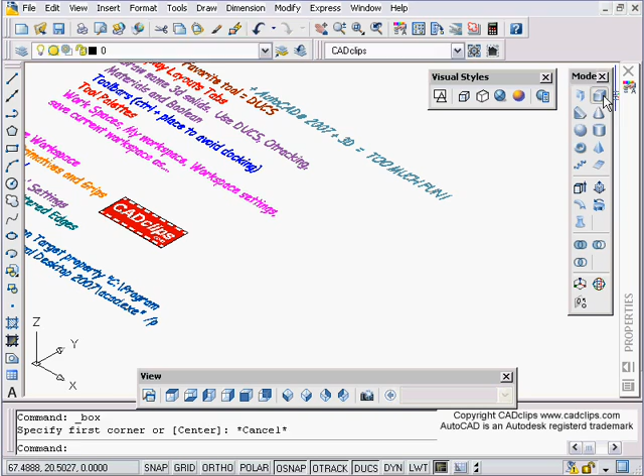And then I go in, start here, click - again doing a rectangle, I can use snaps and OTRACK, etc., and use my different options depending on if I have dynamic input turned on. But the main thing is I can draw that and then drag it up.

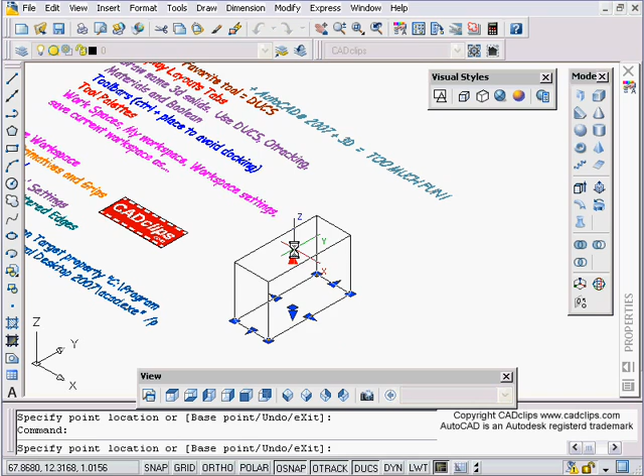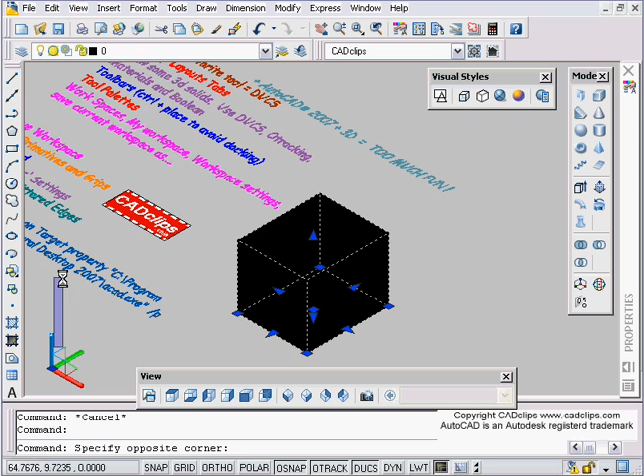Once I have that, I can grip on that solid object now and stretch it out. If you grab the square grip in the middle, we can move it, depending on how you want to do that. And then, depending on your visual style, you might be able to move some objects around - remember this guy over here, by hovering on there, we can do that, etc.

So now we can go and draw some more shapes as we saw before, and they all have their own characteristics - cone, draw them up, sphere, okay, a torus. Read the command line: specify center point here, specify radius or diameter here, and then the thickness of the wall there. M for move it over.

Pyramid, kind of like a square. Again, you can use your ortho if you want. You can also read your command and type in numbers, etc. along here.

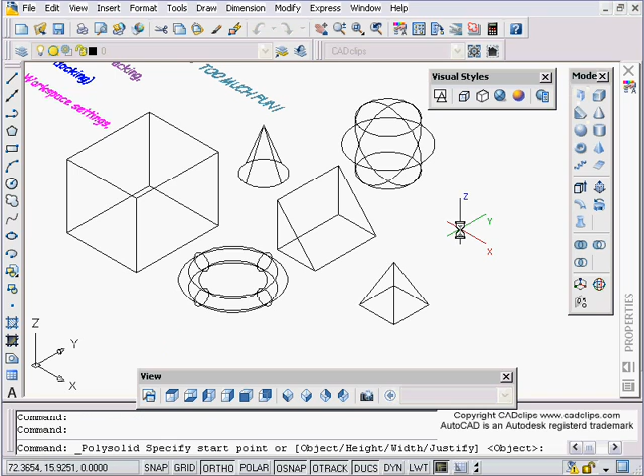Got a new one over here, polysolid, which is kind of like drawing a wall. First thing we want to probably do is specify a height - H for height - and say I want it to be this high. Then I'm going to say W for width, and I want it to be this wide. And then I can pick some points. The new polysolid command works really good.

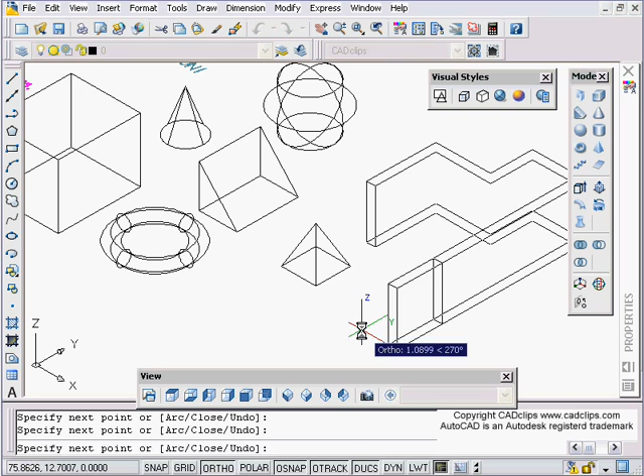Oh, after all that, I hit escape too quickly. Good thing it remembers my settings. Enter - hitting escape doesn't do it. Okay, switch between my different views.

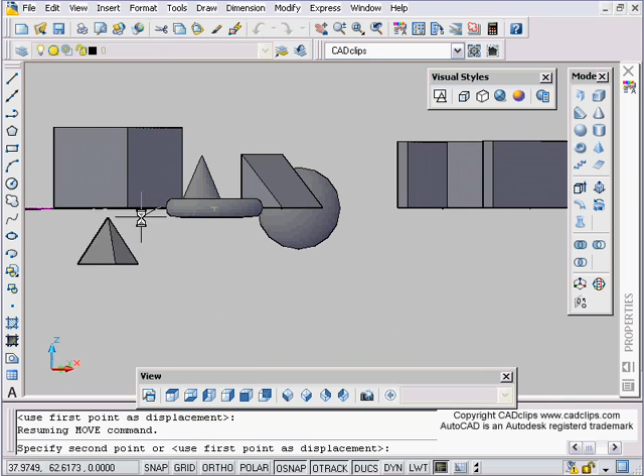Now what's interesting is if you take these and move them around, you'll notice they blend in and out of the objects a lot nicer, so you can tell that's on the same elevation as that. If I move this from the end point of here to the end point of there, now when I move this around, it's not going to interfere with anything - shift middle mouse button - it was placed underneath that as I move it around.

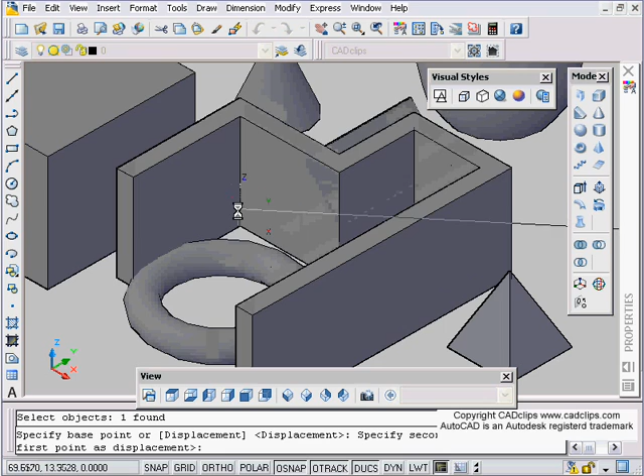Okay, so let me undo that right back to its original location. I can take this and as you move these objects through each other, you can see it's really nice that you can kind of tell visually where they are. This is just huge improvement, being able to visually see if things interfere. Okay, we can place that on there, hit escape.

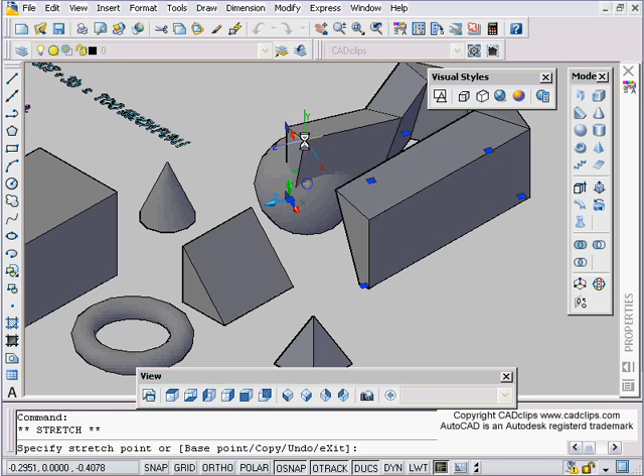You can click on it and then grab these grips, and you can move these around. This poly-solid in particular, you can do some really neat stuff with it because you can grab these grips and stretch the width factor, etc. Maybe bump that out like that. So poly-solid is just a super fantastic tool that you can use to create whatever you want.

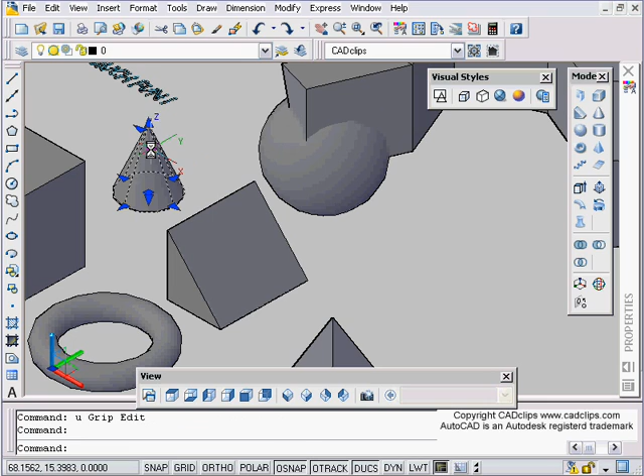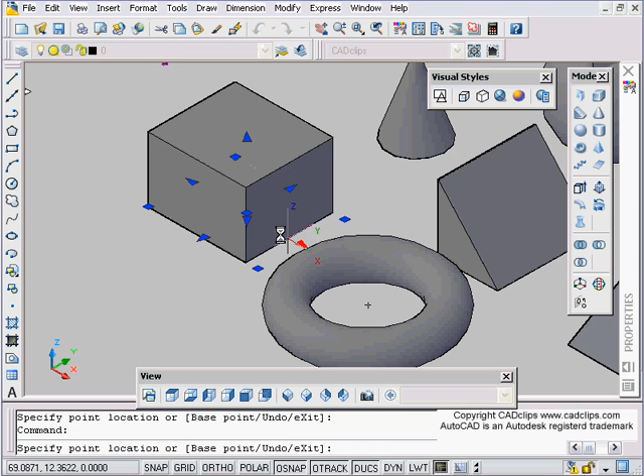Other objects, depending on what you have, will depend on where your grips are with those objects. Again, using your object snap, whatever you want. Add your materials later, go in here, click on this. Starting to look like what some pretty high-tech animation and 3D solid modeling softwares have had, and we're very grateful that Autodesk has now got on board with that, so we can use that. Okay, those are our primitives inside of here.

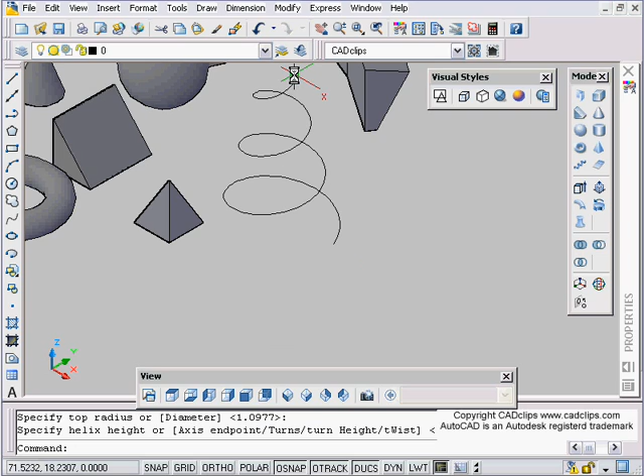We also have a helix. Pick on the helix, we're going to read our command line. Specify the center point here. Specify the base radius here. Specify the top radius here. Specify up. I don't know what else to say, that is just super fantastic.

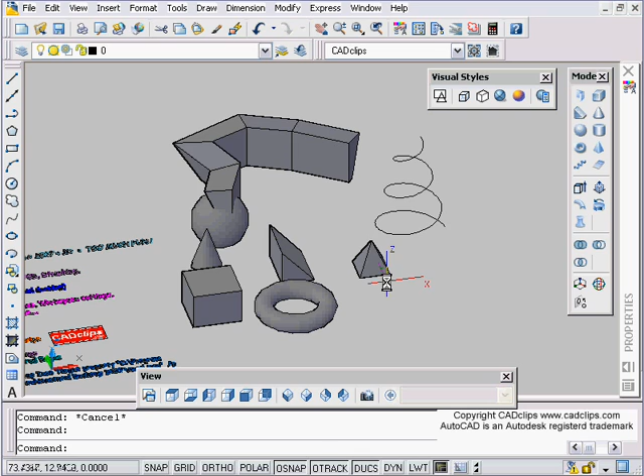And then you can use these objects and extrude things around them and stuff, and again that has grips. Of course, mechanical people have great use for this type of thing. So there's just some of the primitive objects that come with AutoCAD 2007 in 3D, and we're going to work through some more of these.

Again, this is the modeling toolbar. Right click, modeling. We're going to get into some more of these with our extrude and push-pull, where you can go in and pull faces off and all kinds of great stuff. Push-pull, pick on here, pull that face out. Once you've done that push-pull, you'll notice you'll lose your grips.

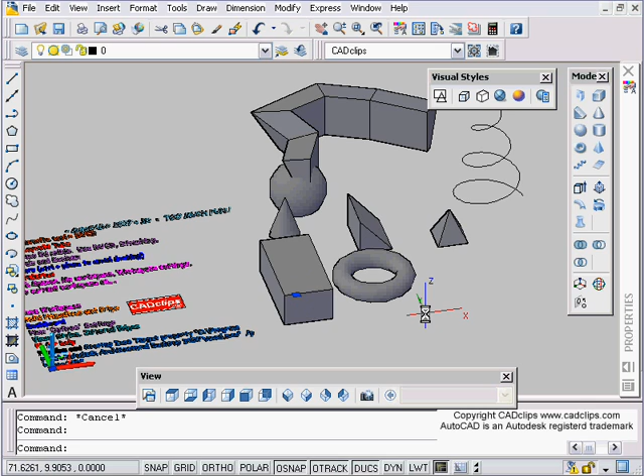I can go down to here and pick on this object, and I can grip it and do all kinds of great stuff with it. Once I go in here and use my push-pull, pick that face, I can pull that face off, which is really nice. Same as I can go over to here, pull this face off.

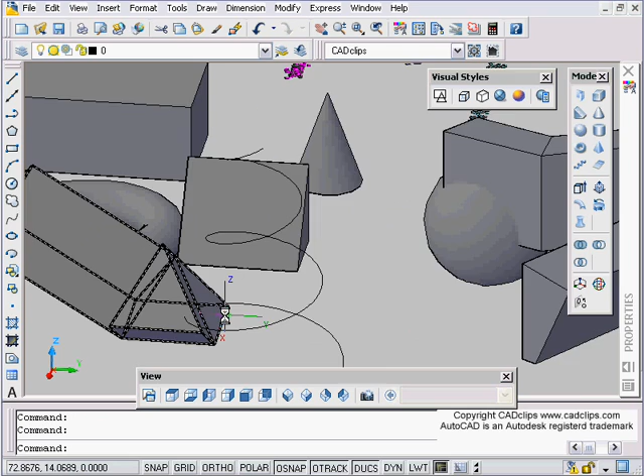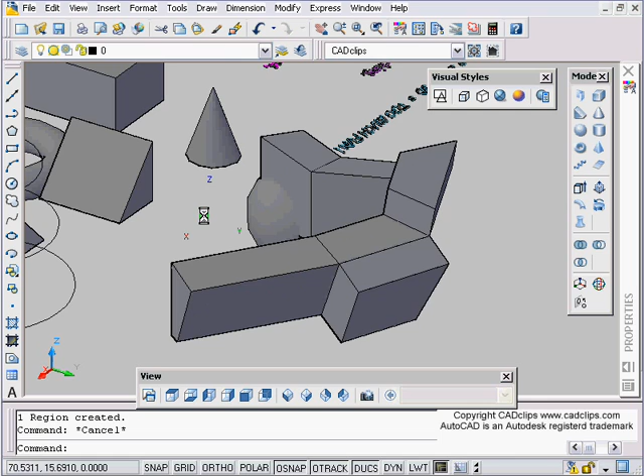Once you've altered it, I'm going to use shift middle mouse button here. Once you've altered the object, it loses all its great little primitive grips, and of course you can do other things with it as well. We're going to come back with the push-pull tool specifically to start doing some of this stuff. You want to have some good video memory as well, so you can see our push-pull, which is starting to look like what some other 3D applications have had for a long time. So once again, thanks to Autodesk for bringing this into us.

So back to wireframe, let's go back to our top view. That's again just an intro, we're going to do some more stuff on this as we move through these lessons. So that's solid primitives and some grips.

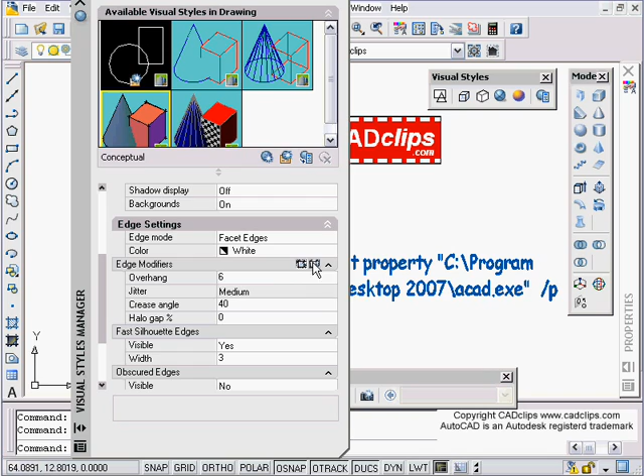You can go in here, and we'll do this later. You can add jittering so you can get an effect, you're getting a jittering effect with those on edge modifiers, so you can add those in. You can click on here and see some more options as well. We'll come back and get to this.

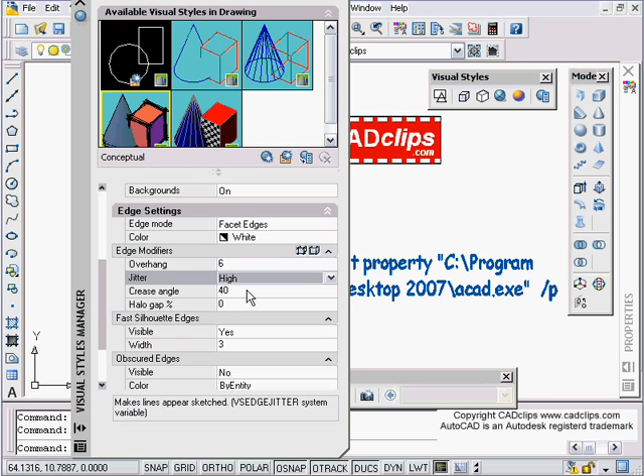We've seen this in other CAD softwares, where you basically make all your lines look kind of squiggly, which is nice for any sort of napkin-sketched look or whatever you want. And this works in 2D or 3D. So jittering medium, well maybe we'll make jittering high, and then go to here and export. Where do we want? Apply to current. So there is added some jittering. Look at what it's done to the text, it's made the text that way.

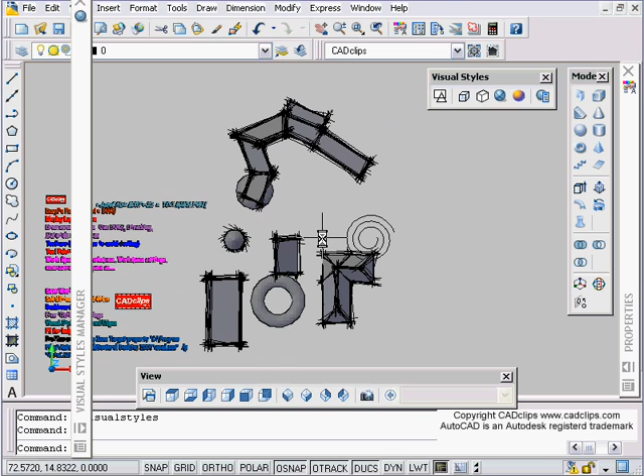It's also taken our 3D objects over here. Let me turn my auto hide on. Okay, I've turned jittering on in this particular visual style. If I even go to my 3D view, it doesn't matter. That's jittering turned up high instead of low or medium, and you can do some really neat stuff.

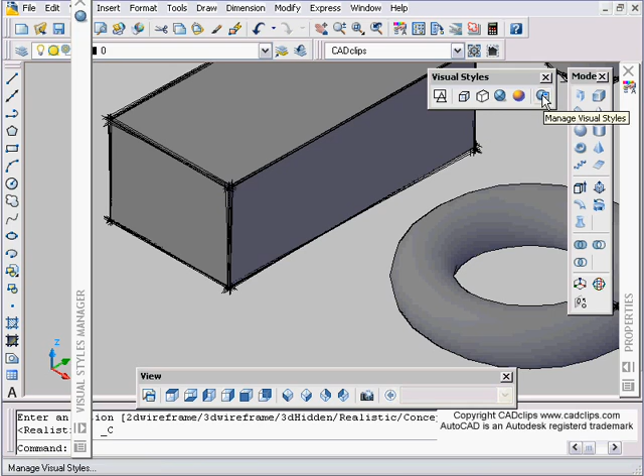Go back to my 3D hidden line. Depending on which visual style I go to, and that one happened to be my conceptual style. If I go back inside of here, we can hover over these and it'll tell us there's conceptual. That's the one I just changed. Well, maybe I'll go back to conceptual.

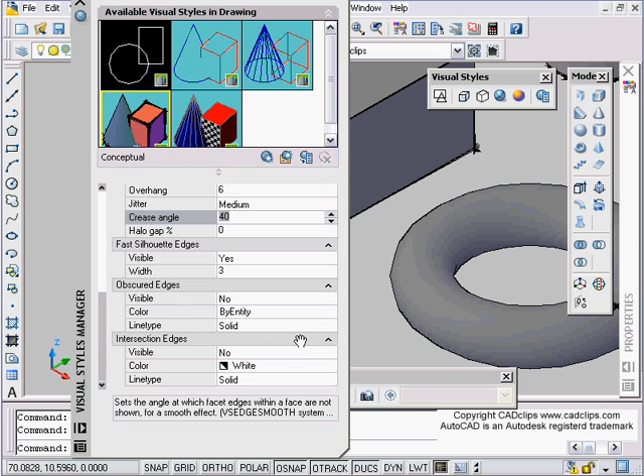Jittering is medium, high, medium, and you can put some numbers inside of here and all kinds of great stuff. Have a look. The only way you learn is try it out, and then hit our apply button. And there's our new visual style. So this is really neat for the architects, for obvious reasons, to make it look kind of hand-drawn. But for whatever reason, I'm going to start using this. I already have.

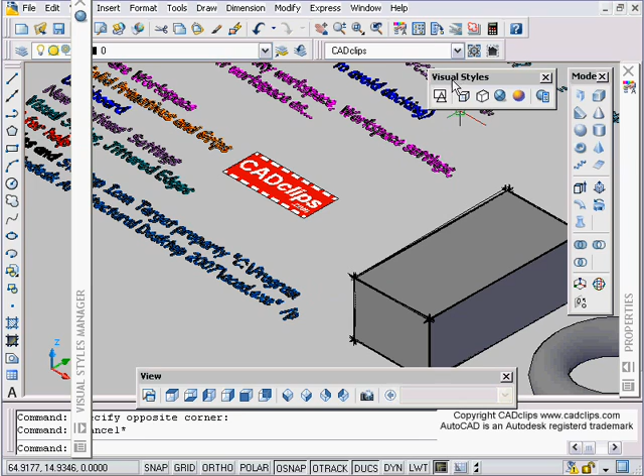A little bit about visual styles. Don't get that mixed up with your actual workspace. Workspace sets up the appearance. Visual style is the way these objects, your modeling objects, appear. That's controlled with visual styles.

Go back down to here, and also notice that when you change from view to view, it doesn't change, where you used to do a regen all the time. Now, if you want to actually go to 2D wireframe, you go to 2D wireframe, and you go back to conceptual style over there. So there's some visual styles, a little bit of jittering.

Hit F1 anytime you want to start a command. If you want to know how the push-pull command works, start the push-pull command and then hit F1, and it'll start up your help and it'll go straight to that command.

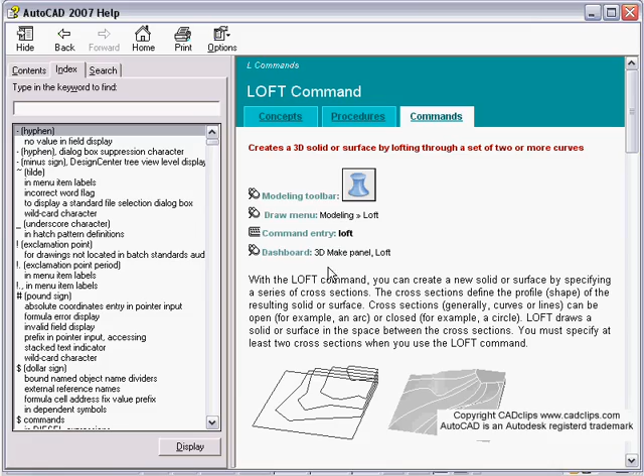This has always been there. This has been typical of AutoCAD for many, many releases. So anytime you want help on something, start the command, go over here and say loft, and then hit F1. And then there it is. It's going to give you some information on how you do that, different tools and stuff. So use your F1 and get some help.

Profiles and the startup icon. All I want to talk about here is this, an oldie but a goodie. When you start up your AutoCAD, depending on if you have Architectural Desktop or not, if you right click on your AutoCAD startup icon and go to the target field, you'll notice you can place a /P, which loads a profile, and we put this in quotes. So if you have an AutoCAD profile saved, you can start up your AutoCAD and put a flag on there, /P.

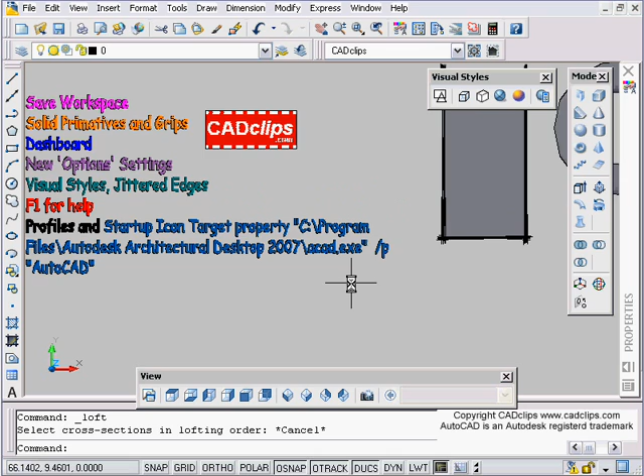And there's a /T, and there's a couple other switches. I called that a flag, it's a switch. So when we start up our AutoCAD, we can put a profile switch and it loads a specific profile. Our profiles, of course, are all saved under here under Options. Profiles, there's the one it's loading. And we can read up a little bit more on profiles.

Workspaces have kind of alleviated some of the work. We used to use a profile to save a lot of our stuff, and now we can use workspaces and visual styles to accomplish that. So again, kudos to Autodesk for helping us out with that.

So that's all I wanted to talk about in this particular lesson: our workspaces, solid primitives and grips, our dashboard, some of our option settings, visual styles, jittering, lots of fun. Use your help F1 in the middle of a command, and then just a little old trick we use to put a profile switch when we start up our AutoCAD. It will load that particular profile for us, and we can have more than one startup icon, therefore starting up our AutoCAD to look different ways and call up different profiles.

So tune in for our next lesson, where we'll probably slow it down a little bit and dig in deeper with some of the specifics of using 3D for AutoCAD 2007.